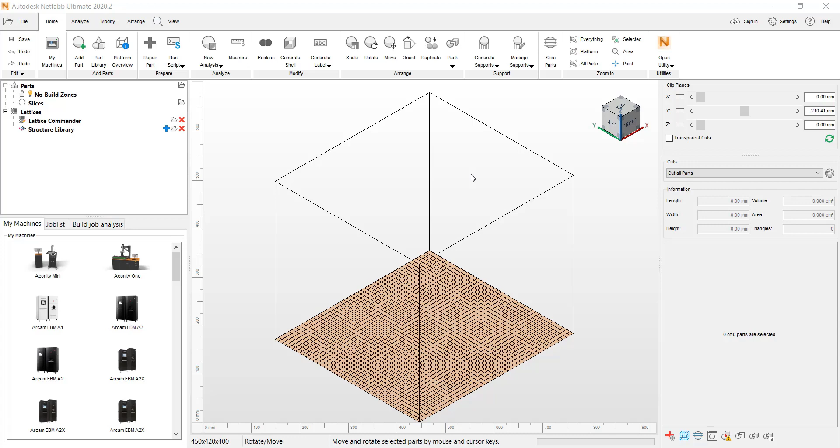I'm a Netfabb technical sales specialist, and today I want to show a feature of Netfabb called Mesh to BREP. So let's go ahead and get started. I'm going to go ahead and load a part. I got a bracket.3mf file.

We do an automatic fix when we bring in the part. And what I want to do is make some modifications to this triangulated mesh here. I want to go ahead and make these spot faces here where the holes are and extrude that up a little bit and fill in one of these holes on here to show that if we make some changes to

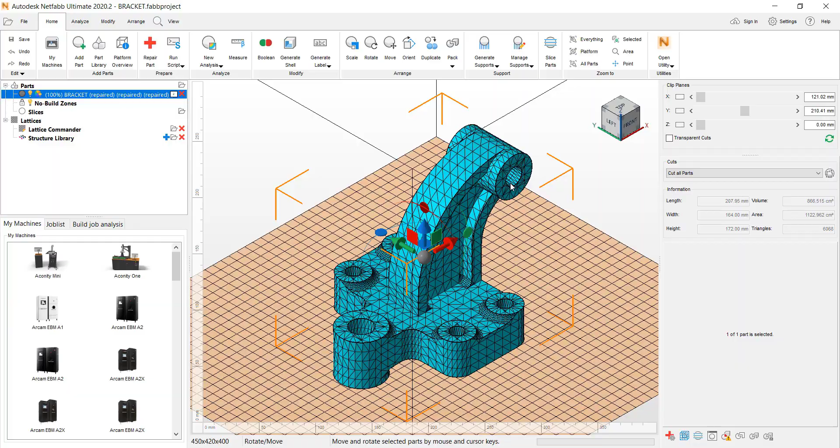this geometry, we're able to save this part as an IGES, a STEP file, or a SAT file to re-put into our CAD software to do more modifications there, or just have a record of what we changed in our additive software here. So let's go ahead and go to our repair module here.

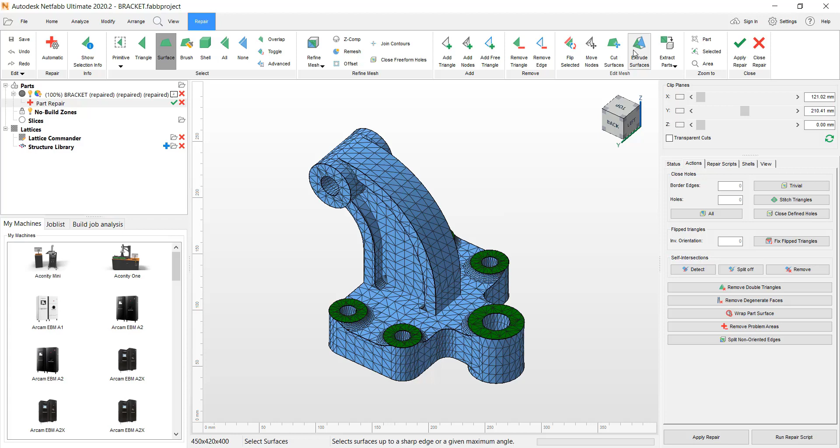And this is where I can mark faces or triangles on the part. I'm going to go ahead and use my surface marking tool here and mark these spot faces. And we're going to go ahead and extrude these. I'm going to mark those. We'll go up to the edit mesh tools up here, extrude surfaces.

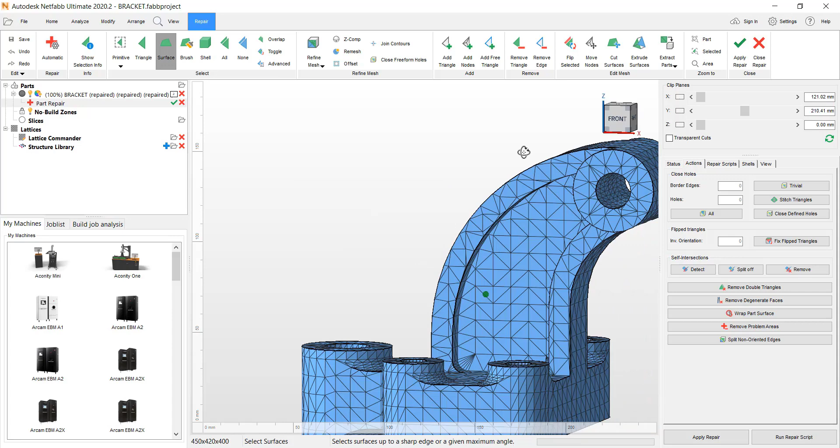And we'll keep the 5 millimeters here, showing you a preview here. We'll hit apply, and it's extruded those surfaces up to 5 millimeters. Now let's go to the cylinder here and mark these areas using our marking tool surface here. Mark the cylinder in there. We can go ahead and use remove triangles.

Now we have a hole in the part that we want to fill in, and we can easily fill that in by going to our Actions tab here on the right, hitting the All Hole Fill option here, and then we filled in that cylinder on the top there.

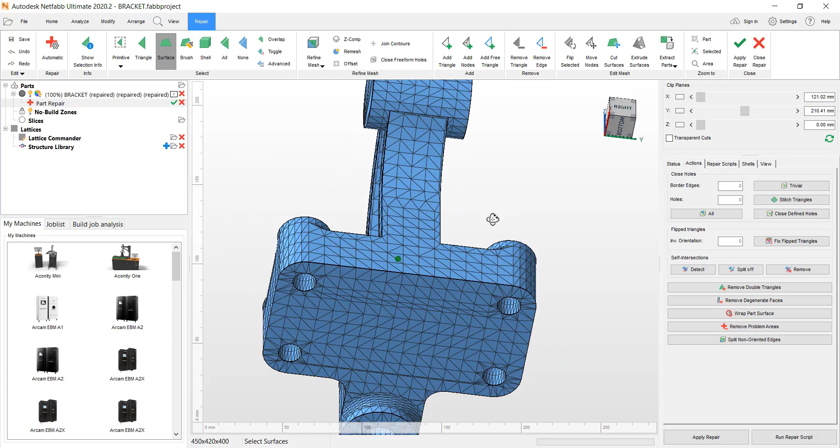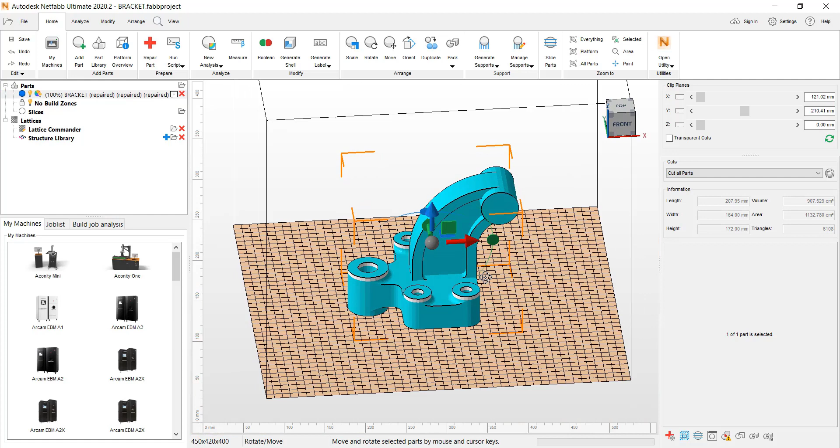And now I want to be able to save this part in an IGES format, so we're going to go ahead and pick Apply Repair here, save what we've changed, remove the old part. Just takes the old part out of the parts tree there. And now I have my part here on the screen that we modified. I'm going to turn off the platform here for better viewing.

So we have this part here. We've extruded the spot faces on here. I filled in the cylinder hole on the top. We want to save this to an IGES, and we go about that by going to our Modify tab up top, and we got Mesh to BREP.

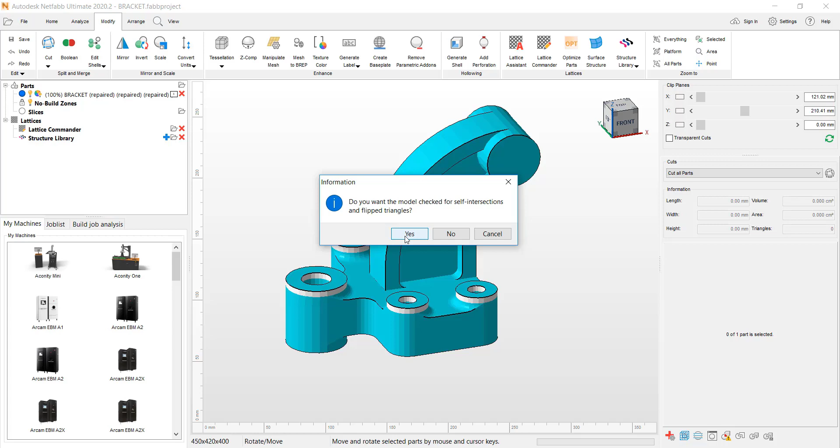And when you use the Mesh to BREP, you're going to get this dialog that tells you you need to check to make sure that this part has integrity. It has no self-intersection and no flipped triangles. We're all good there. And now we have a dialog for the parameters that we have to make the BREP patches that will show on this part when we create that.

I'm going to re-triangulate it. I'm going to detect and preserve sharp edges. What this does, it'll make sure the sharp edges stay on the part when we create the BREP patches.

We have the option because typically people are taking generatively designed parts or anatomical shaped geometries and using this turned off. And when you turn it off, it'll round the corners. We want to keep this part with the sharp corners, so we'll leave that on.

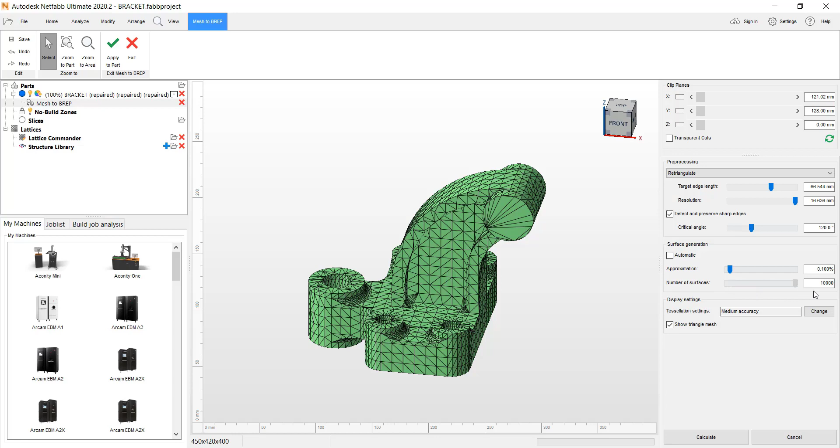We're going to go ahead and put the number of surfaces that they can go up to. We'll put it all the way to 10,000, and then we'll go ahead and hit calculate here. And at this point, it's going to put the BREP patches on the part that we'll see here in a couple minutes. And here we are. We have the BREP patches on the part.

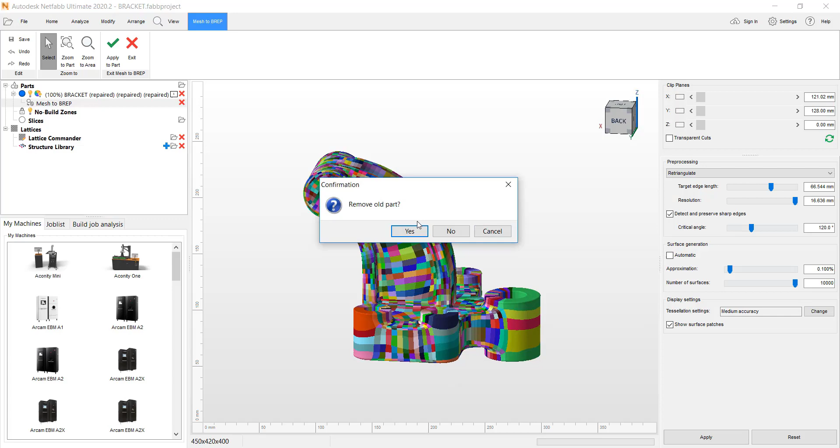We're going to go ahead and hit apply here to accept what we've changed. Do I want to remove the old part out of my parts tree? Yes, I do. And now we have the part that is complete here that we can then export out as an IGES file or a SAT file or STEP file.

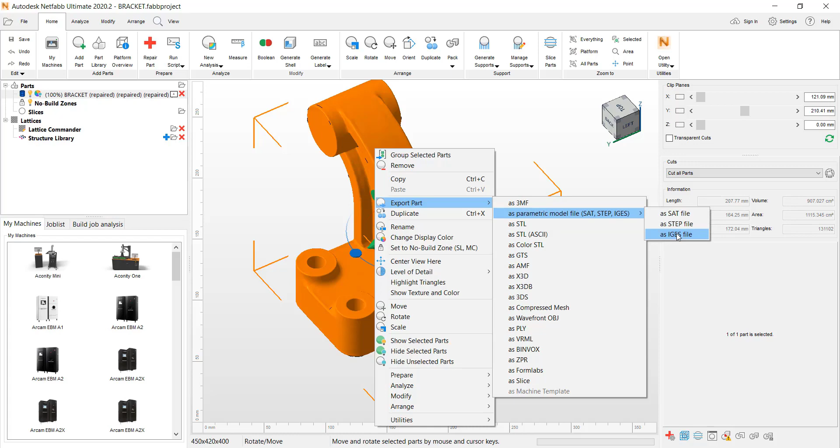We do have other formats that we can output to, but we're going to go ahead and go IGES. And then you say okay, save it in your directory. And what'll happen here now is you'll have the ability to open up this IGES file in your

CAD software to either make some more modifications or at least have a record of what you changed in Netfabb software. And that's a great tool to have to be able to go back into the CAD package from what we've changed.